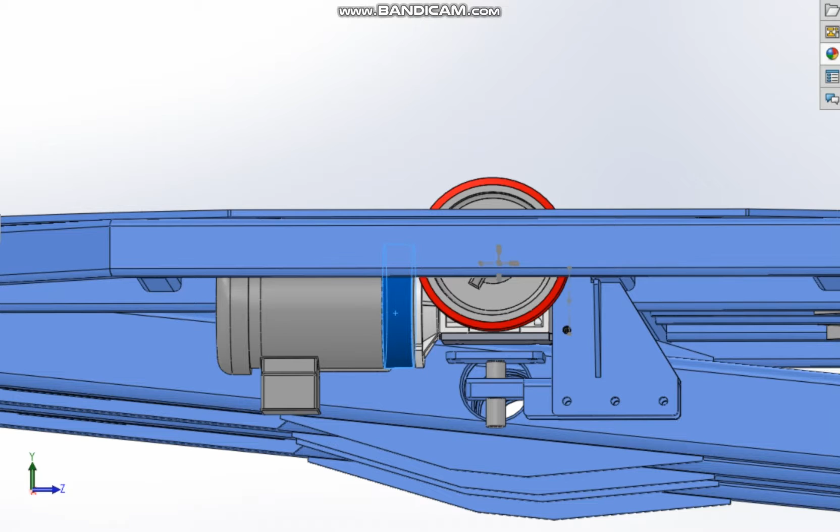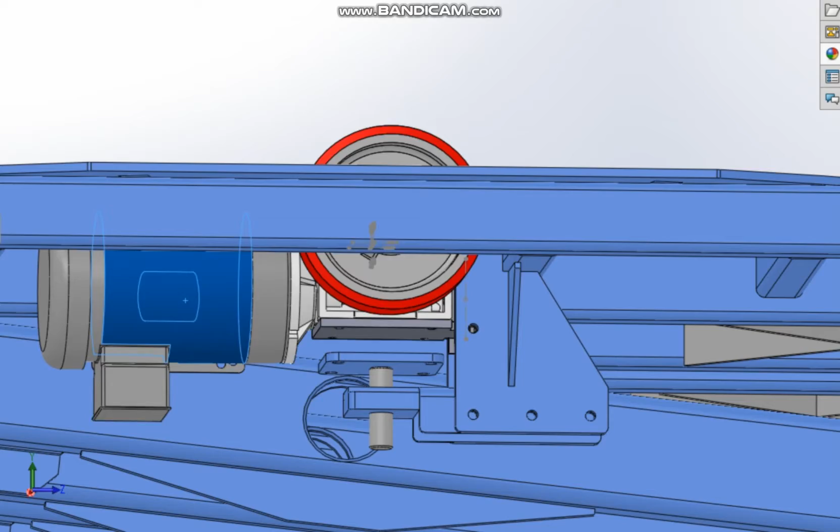So here's what I came up with. After looking at this thing for a long time, I was able to fit a linear bearing and a linear rail up front here and keep the geometry all the same. You can see we kept that same base plate. This is where their springs were attached to, and that's the original base plate. So the geometry is all the same, and everything fits inside of that existing framework.

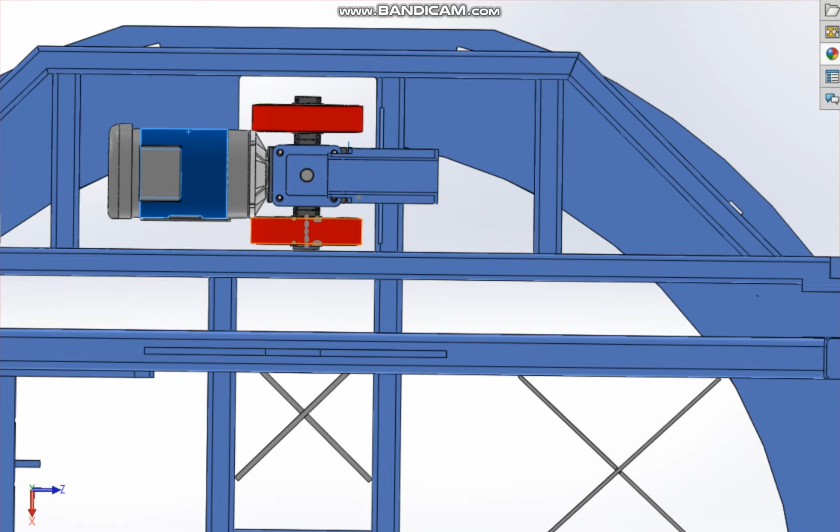Basically, after I noticed the tensioner bolt was dead center of the gearbox, you can see it right there, it became clear that all I really needed was an idler wheel on the inside to keep the side load off the gearbox and the slide assembly. To be extra cautious that no binding could occur, I changed the gearbox mount to accommodate McMaster number 9215T22. Let's just pull this out of there. That's this carriage right here.

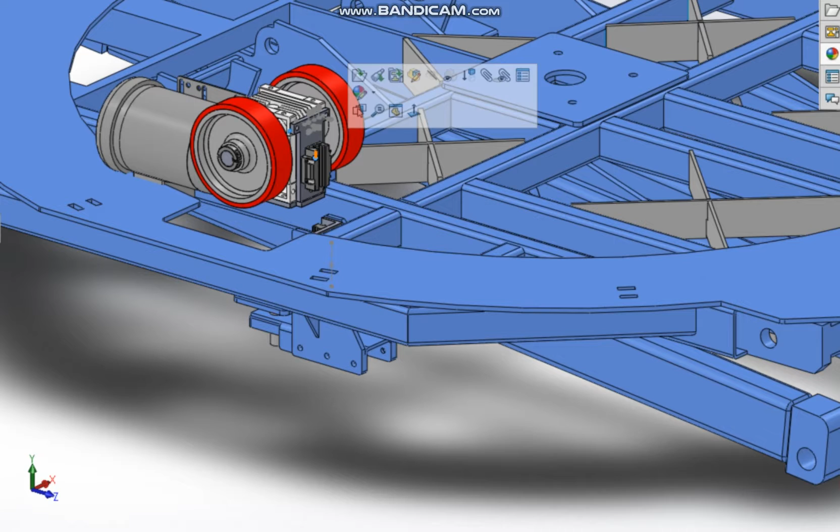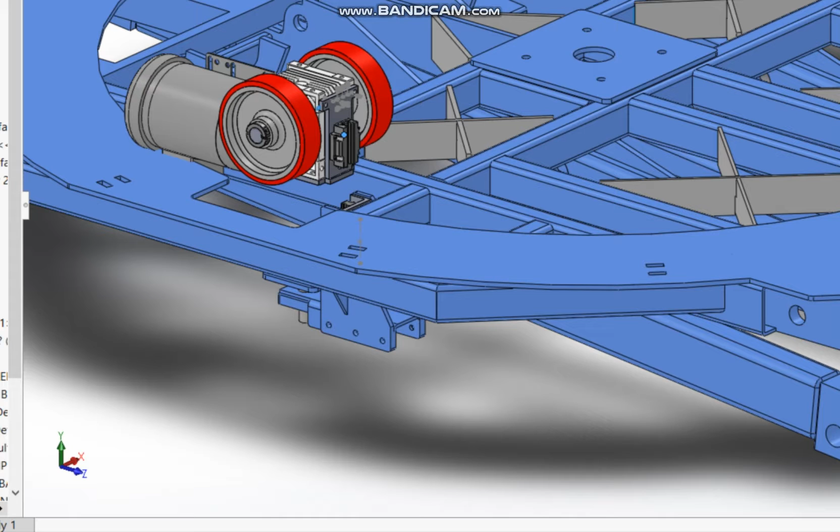That's good for 5,200 pounds of dynamic load. I am somewhat concerned that the rollers will not see enough movement, because Bosch recommends that the course of a cycle should make the rollers do a complete loop in the housing to aid with lubrication. I did face the grease fitting down.

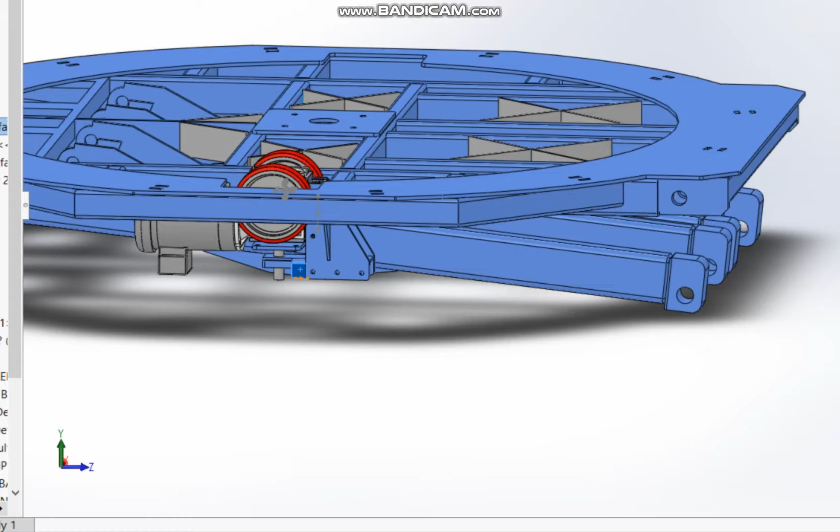So if somebody was determined, you'd have to support the motor and the gearbox with a jack stand or something, because it's just going to freely fall down. If you took this tensioner assembly off, then this whole thing would fall out. But if you supported it, then you could get at that grease fitting.

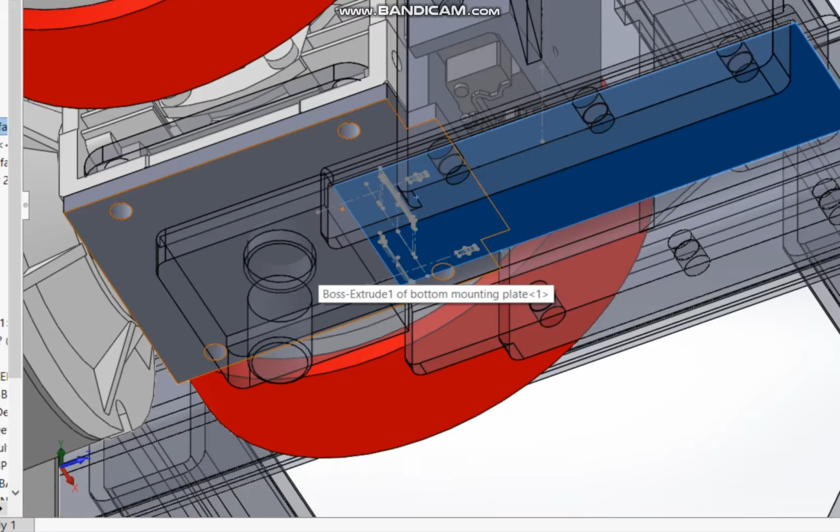I don't think that we're going to have a problem, because the linear bearing is a cylindrical roller design, and it's good for 5,000 pounds. With the speed at which that thing moves, it's 3/8 of an inch. Even if it was bone dry, I just can't imagine those cylindrical rollers seizing up inside that housing.

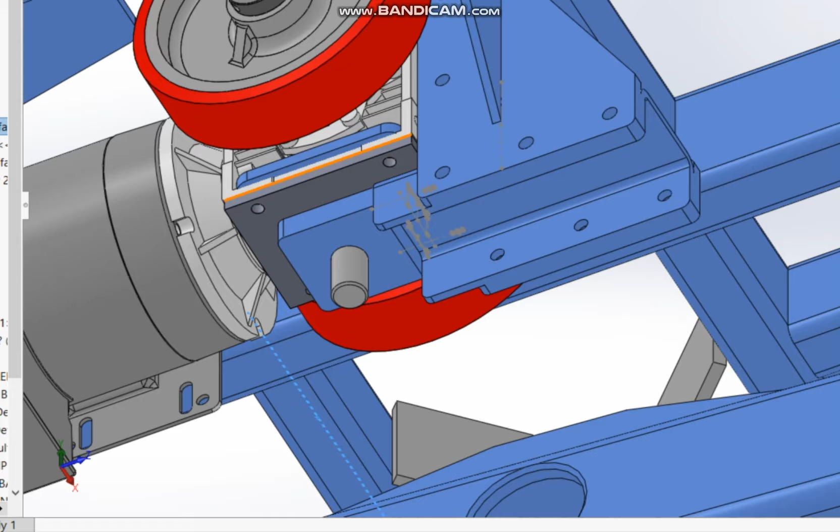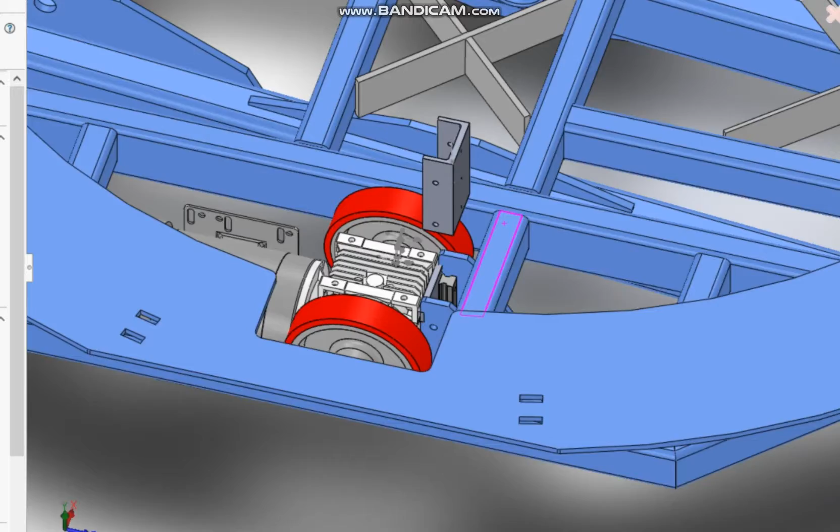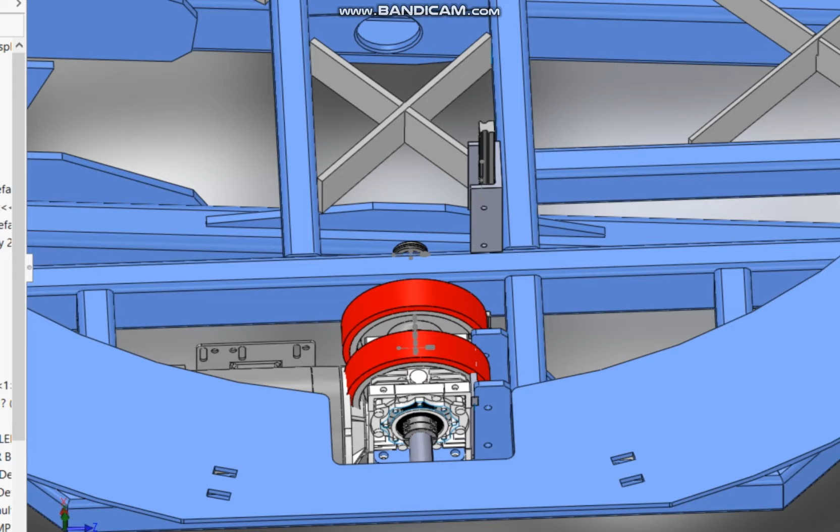I managed to fit the linear carriage and the rail mounts into the existing infrastructure. So if we look at this closer, let's pull this out here. So everything fits down inside of what was already there. I'll pull this up. And you can see a little better there. So that'll fit down inside of what's already there.

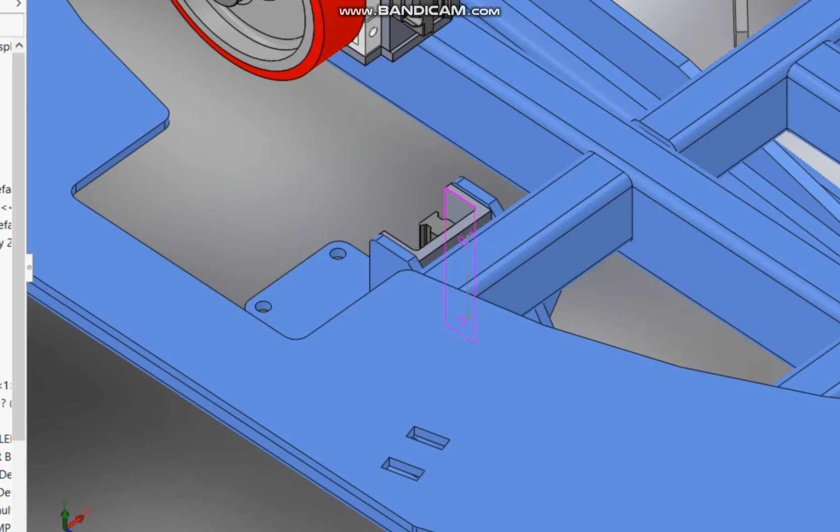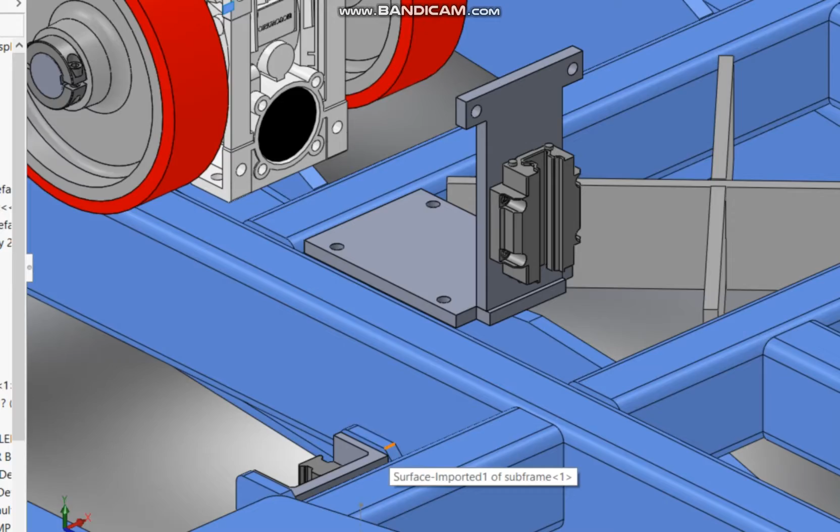And then this mount is a welded assembly. I got a little lip on the front there for some weld, and had to put notches in here to get it around this piece here. But everything fits and should have plenty of room to slide around. I'll come by today and show you the drawings in whatever format you need, assuming we go with this design.

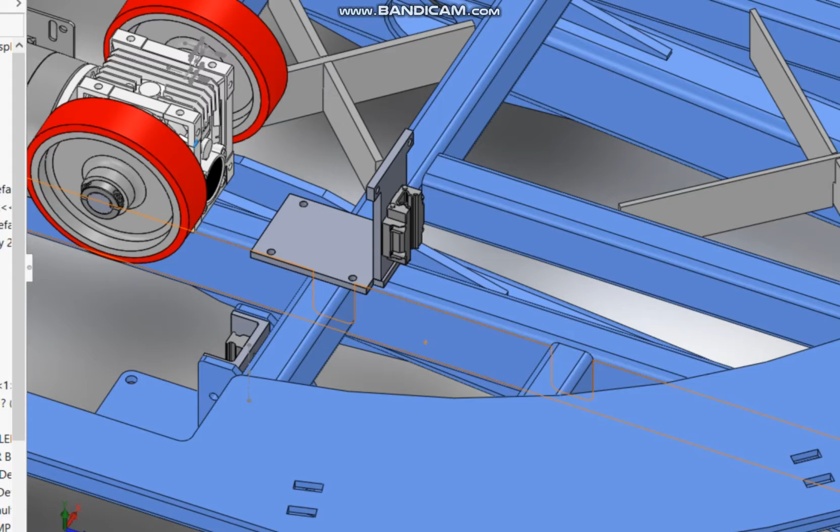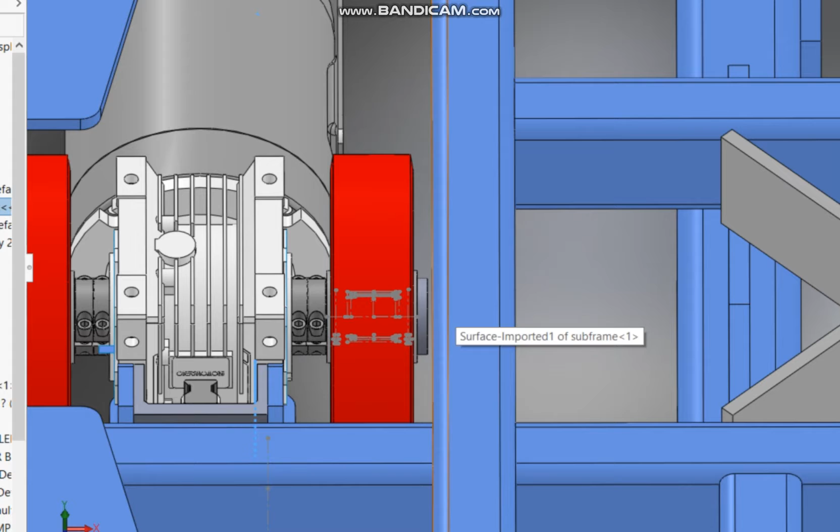So the idler wheel, I think that's going to necessitate a custom shaft. I kind of hate to say it, I was trying to find stuff that was all in stock somewhere. But if you look at the way this thing is, there's just very little room between the end of the shaft and that existing infrastructure. I just don't think there's enough room there for a shaft collar like I used on everything else, and like you guys have used. I like the shaft collars, but there's just not enough room.

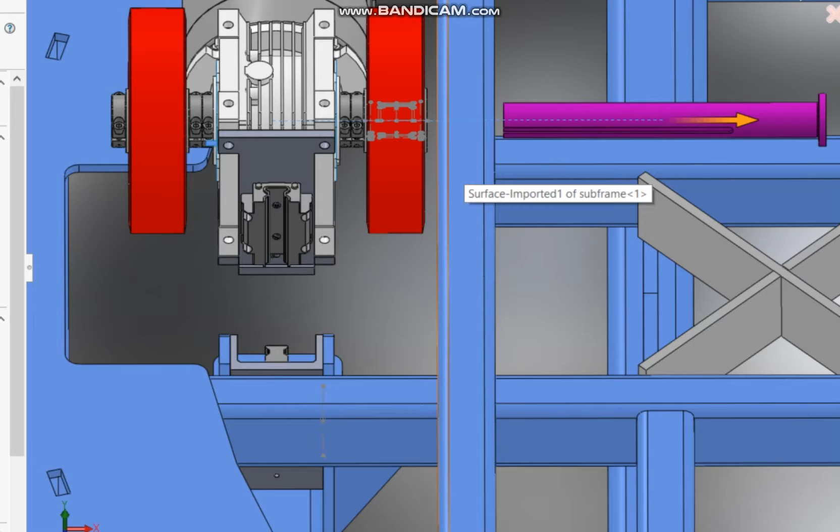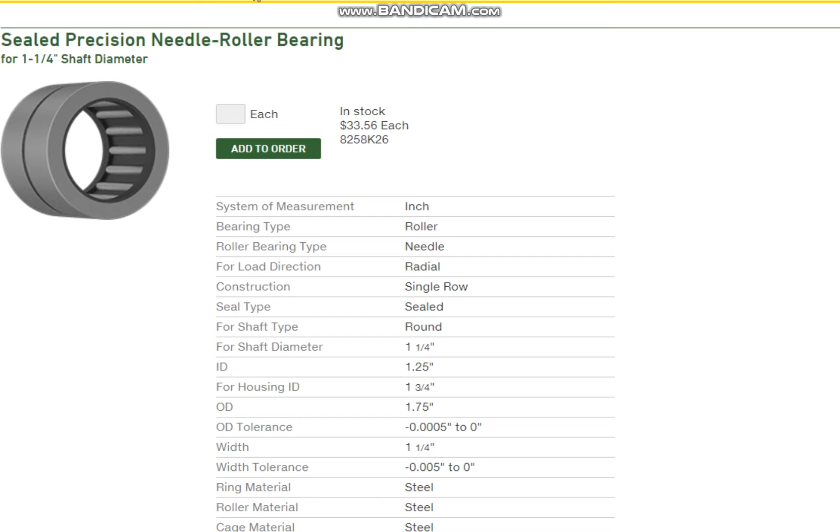So instead, I went ahead and drew up what I'm imagining as a hardened drive shaft, because I've got a needle roller bearing inside. Let's pull out the thrust bearing. And then I got a needle roller in there. I didn't want to have to go with a shaft liner, so instead I went with only the needle roller bearing, the McMaster 8258K26. That's good for 9,000 pounds. I would think that that's plenty.

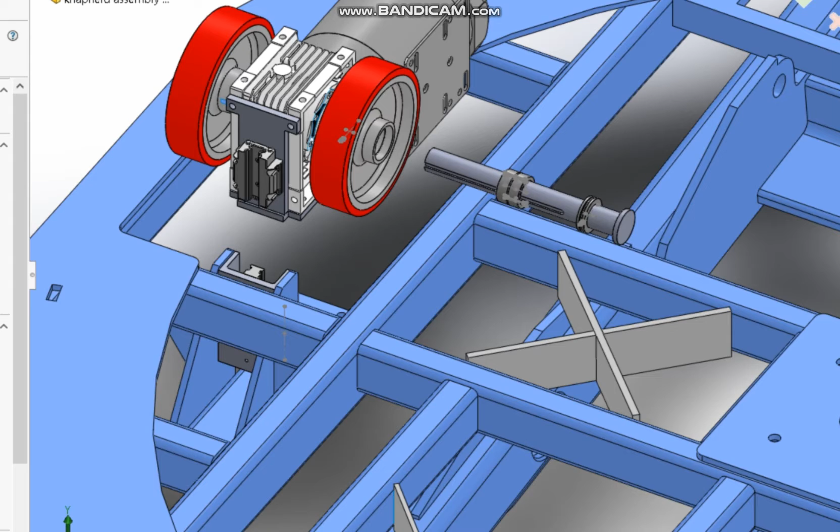I don't think we need to press up. You've got two wheels there holding the load, so that would be 18,000 pounds of force pressing up. That should be good enough. So if I make this shaft heat treated, I don't have to use a shaft liner. We can keep this thing the same size all the way through, so there's no weak points. I felt like we needed a thrust bearing on both sides, so you'll see I got another thrust bearing here as well. And I did a different drawing for that wheel, so you know how deep to bore the recesses for the thrust bearings.

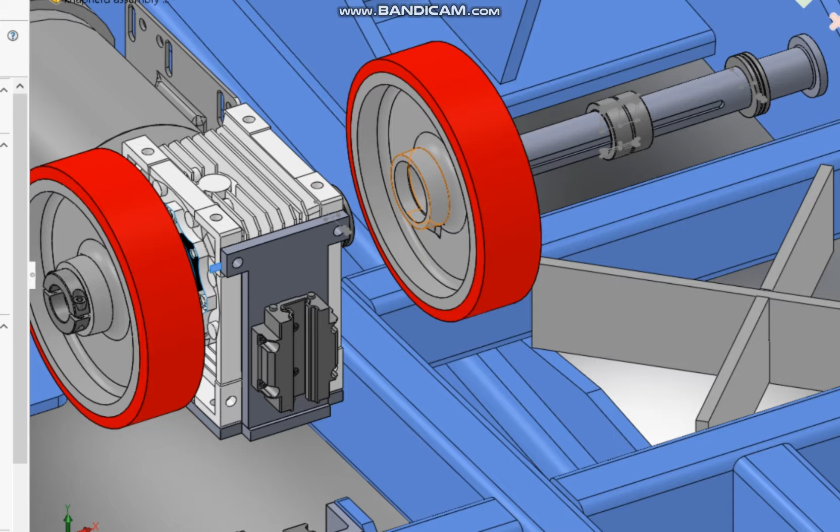I think we can have this made today, though. I know a shop that sends out heat treat every day, so we could make this out of S7 material and have it heat treated today and be ground and finished up tomorrow, if that's the pace that we want to go on. The thrust bearings are McMaster 6655K24. They're not very high capacity. They're only 95 pounds dynamic and 540 pounds static.

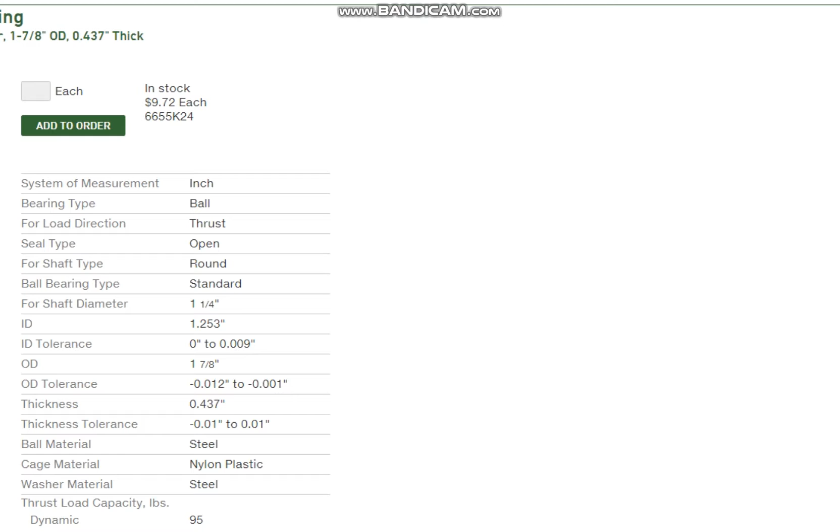But those bearings are only going to see the RPM difference between the inner and the outer circumferences of the path the wheels are on. I did the math, and that works out to 2 RPMs. So we're nearing the static load capacity of 540 pounds, and I felt a lot better about that. Plus, I'm not sure we're ever going to exceed 95 pounds of thrust there on such a large circumference.

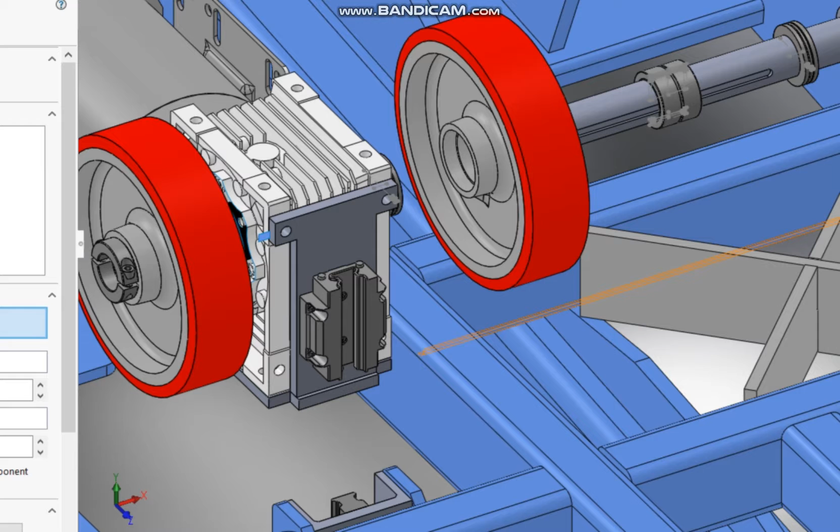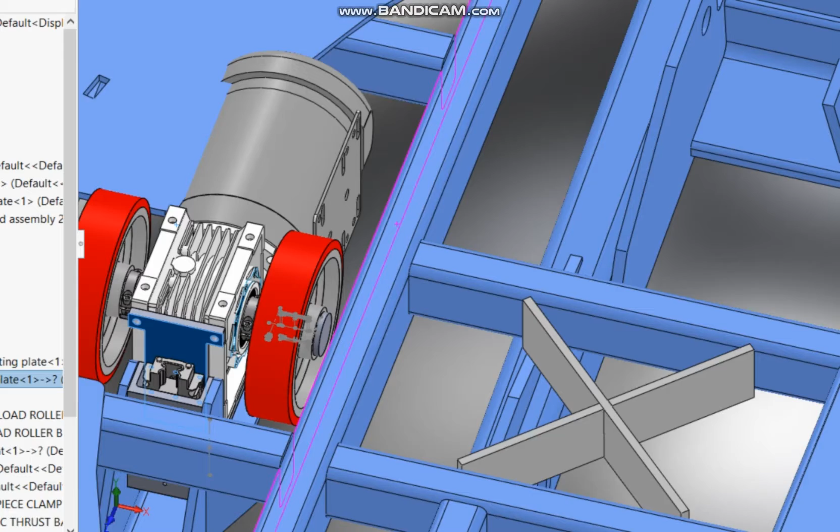If we're still concerned about the overhung load that the motor is causing, there is room in the back here. Put that back together. So there's still room here between the motor mount and the frame that we could mount another set of linear bearings, or just one other linear bearing.

But I thought Randy brought up a good point when he said that out in the field, we'd have to drill some holes into this framework here, and the odds of us getting that mounted in such a way that it doesn't fight this new linear bearing and carriage at the front are pretty low. So I'd rather not do that if we don't have to. But that all assumes that this is the design we're going to go with anyway. So let me know what you guys think.